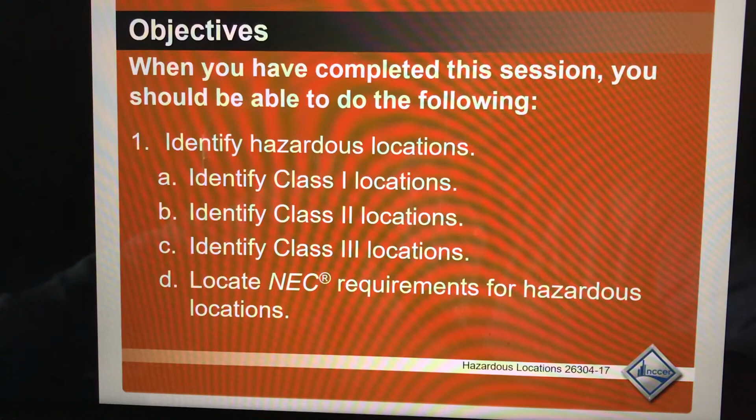Rigid conduit is one way for us to help prevent explosions because the walls of the construction of the conduit are thicker and it's threaded, so it's very solid. If there was an explosion, it would stay inside the conduit—any kind of fire or sparks in a conduit.

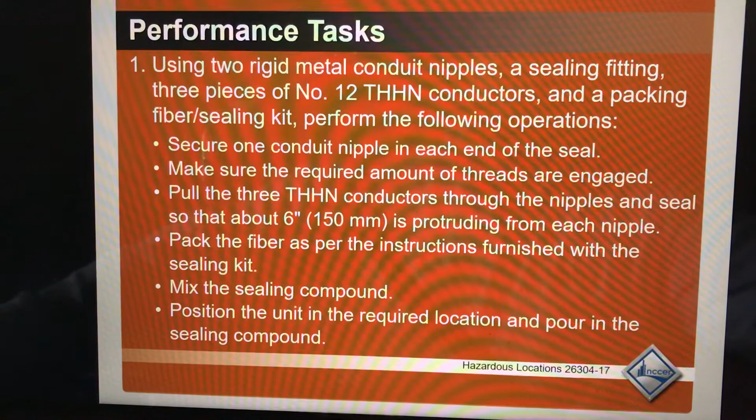Like I said, there are different types of construction locations that we do work in, and I have experience. I worked at a textile location where all they did was cut rags all day long. They would buy these big bundles of rags and cut them all day, then size them down to smaller portions, like about a foot by foot or so. The whole area was filled with fibers.

One day on the second floor of this office, there was a spark. Just a little spark caused the buildup of these fragments of fibers to ignite, and it burned the place. Not all the way down, but enough that they couldn't reopen because it was a fire hazard.

It was one of these classes that needed to be done properly according to code. So what I did was come in and we reran the conduit and did it properly. There were a lot of mistakes on that job, but anyway, this one spark ignited a fire because of the hazard materials.

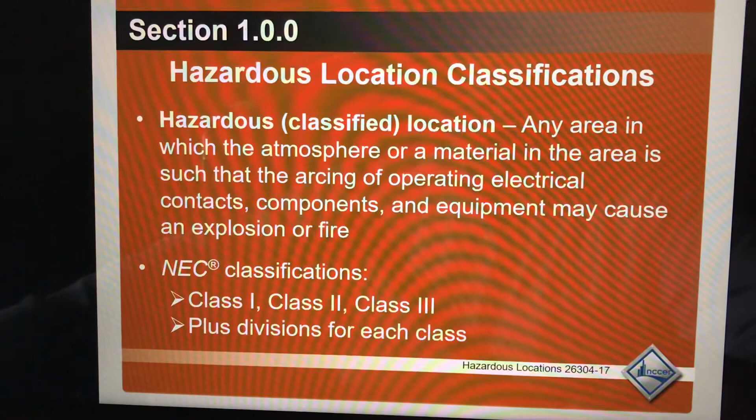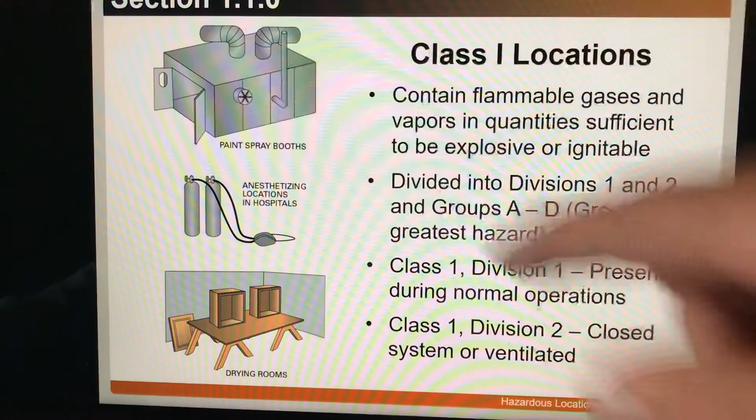And this is an example here: paint booths, like when you paint your car and stuff. They have special on-off switches—if this door was to open up, it would automatically turn off the system. Or if there was a fire or any issue in the dampers, the system would turn off. It's a special way of doing electrical, and everything inside the paint booth has to be vapor-proof lights. So it's pretty neat when you work with this type of class location.

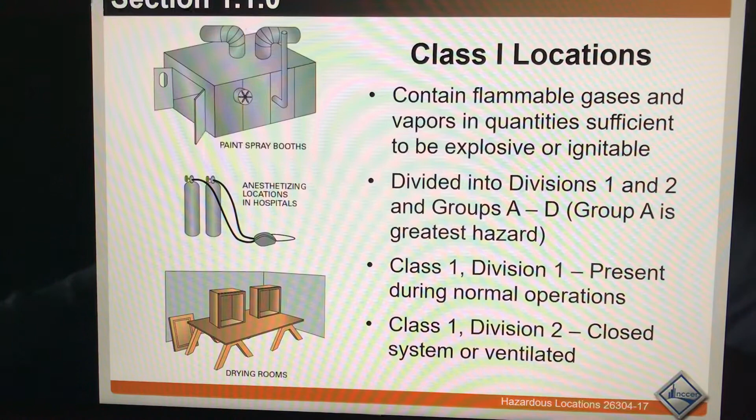You've got to know enough to do it right. This is for me one of the hardest ones to learn as an early journeyman, so be careful when you work with these classifications of installations.

Since we don't live on a farm, it's kind of hard for us to understand how this stuff works. I'm from Colorado, and I did live near a farm, so I got to see this stuff, but I wasn't an electrician back then, so I didn't fully understand why they were using those materials. But be mindful when you're working with this type of classification—some environments you think aren't a problem, but really are. So be mindful of your surroundings.

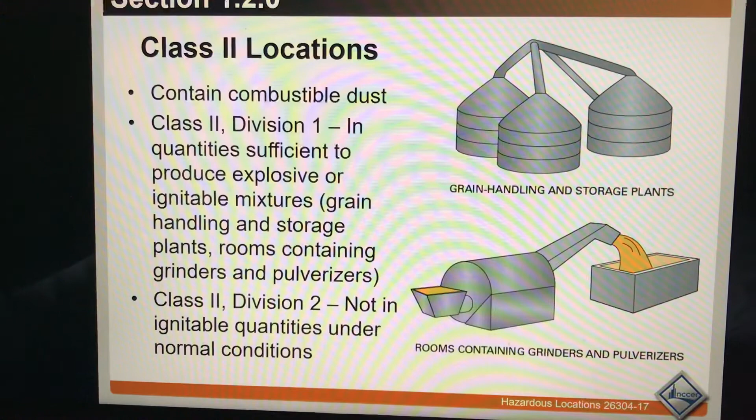Yeah, see, it's Class III locations for fibers—that's in a textile location. I actually got to see it. It wasn't a mill or anything, but they were cutting rags, and it was causing fibers to fly in the air, and it was something else. Just a little spark started a fire.

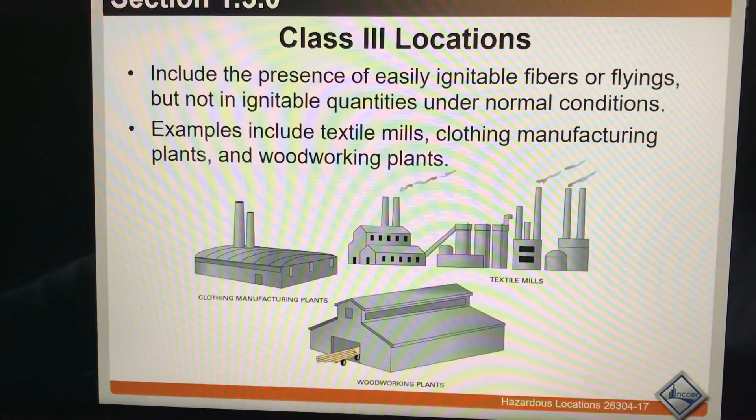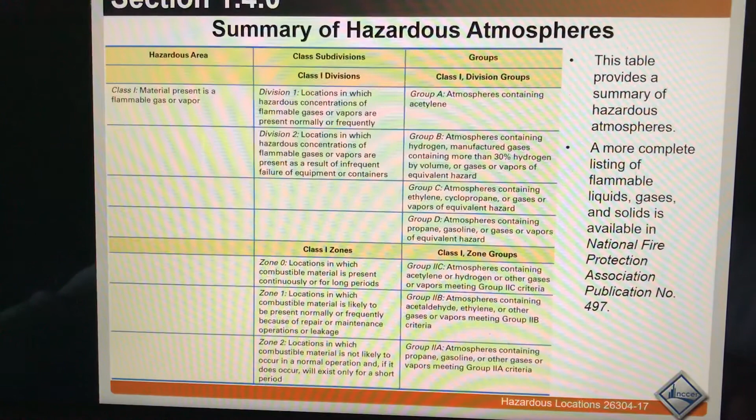This right here—you have tables in your code book as well. It's good to go through it a couple of times and get an idea of what hazard areas are, so you understand the difference between a hazard location and a normal operating location. A lot of electricians don't know anything about this except the ones who work directly in it every day.

So go through it, understand it, try not to memorize it. It's a waste of time trying to memorize this stuff, but just know where it's at and how to get to it. That's the most important thing about being a journeyman—you don't memorize the whole book, but you know how to get back to the locations where you need to know.

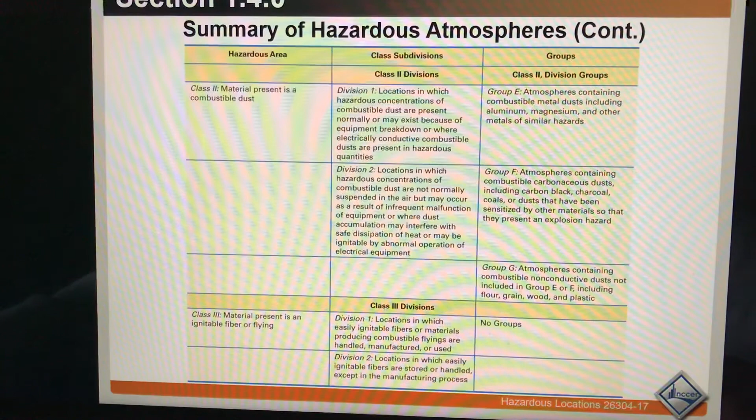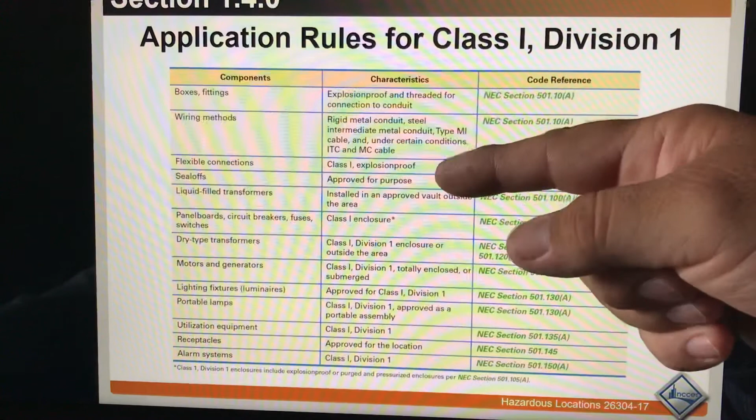A lot of times when we have explosion-proof fittings and wiring methods, if you go to gas stations, you'll see that you'll have these at the gas pump, and it's up to 18 inches, and then above 18 inches you'll have regular conduit. And I used to think, that's ridiculous. Why do you have explosion-proof fittings and conduit only up to 18 inches and then have regular conduit above that? Gas is gas, it's going to explode, but not necessarily.

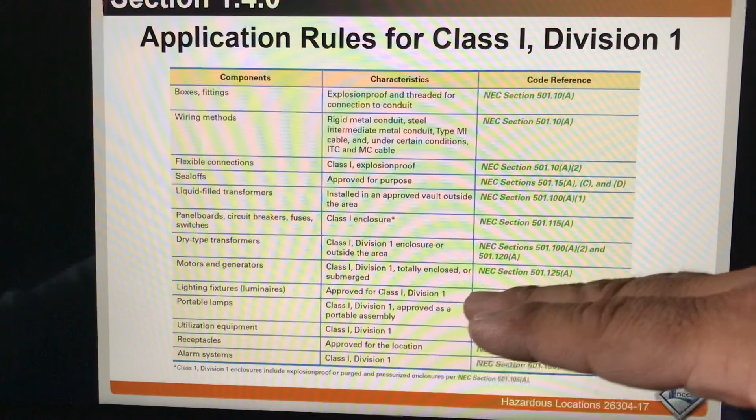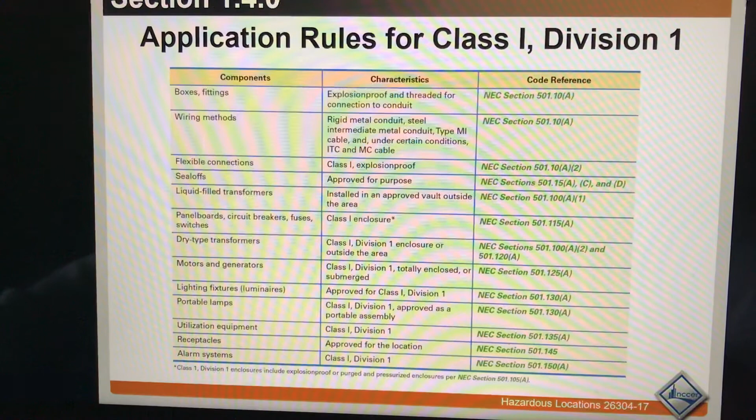What gas has is a vapor. The vapor will rise up to about 18 inches. It's too heavy to rise any higher. So that's why gas vapor probably stays lower than 18 inches. But our rigid conduit has to be around 18 inches from the ground level up. And then we had to fill them in.

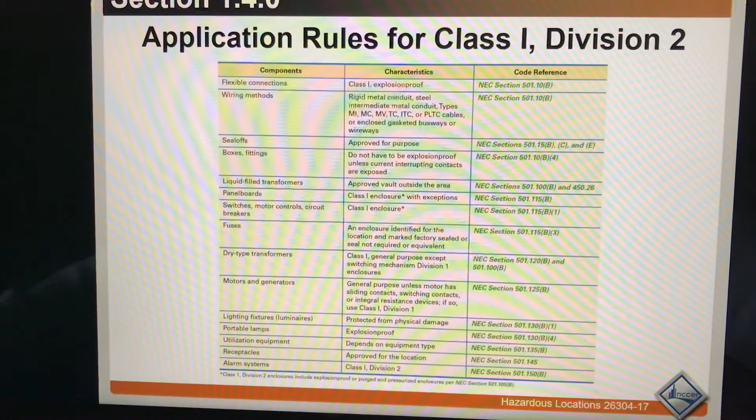And there's one time that I had to actually open up one of those explosion-proof fittings, and I had to drill out all the hard material that's inside, so that we can re-pull wire. That was a task. I mean, normally you're not supposed to do that, but I was an apprentice. They had me do it. I did it. We pulled new wire. So

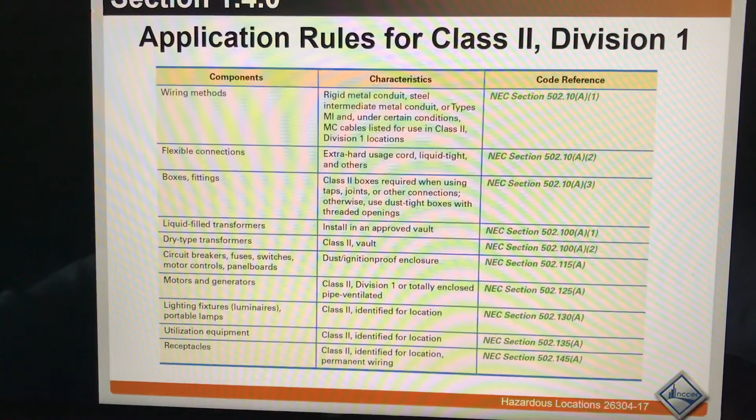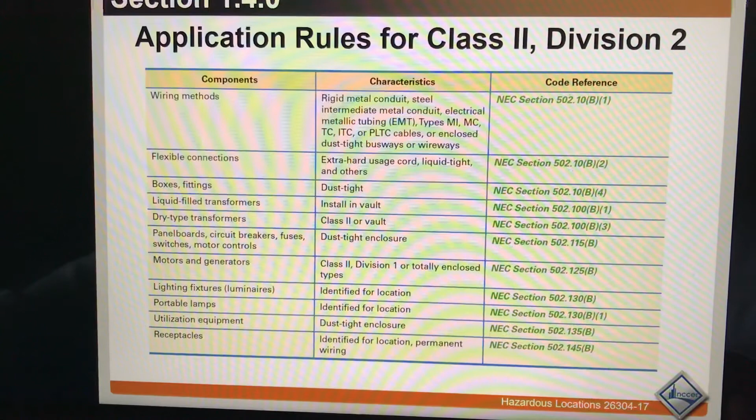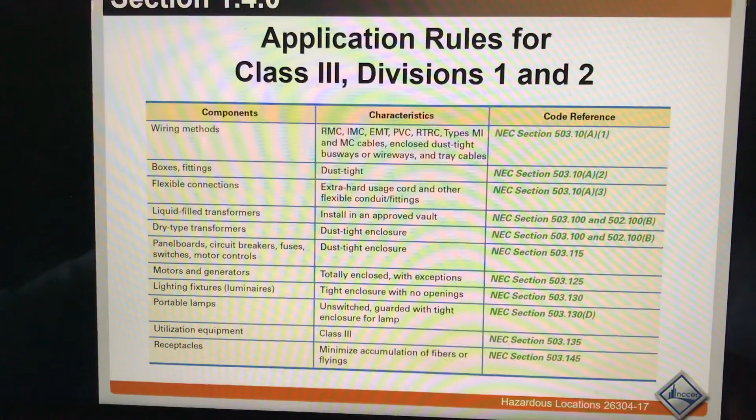Yeah, this is something that you can't just look at and memorize. I'm not too sure if you have this section, but it's good to know where it's at. Go through it a couple times, kind of read through it. It just gives you information, what you need to know, certain applications. Well, I think you should learn the classifications first, and just figure out what class it is, and then from there move on.

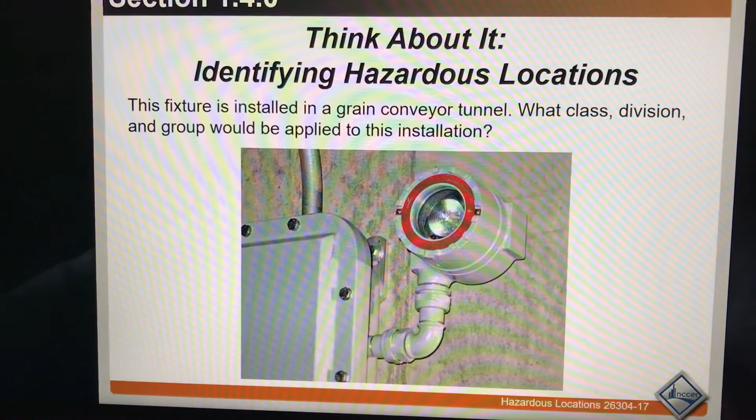So it's a grain conveyor tunnel. What classification, division, and group would be applied to this installation? Look at that. Everything is explosion proof. You find these in the shipyards. Not so much the explosion proof, but just the connector and stuff.

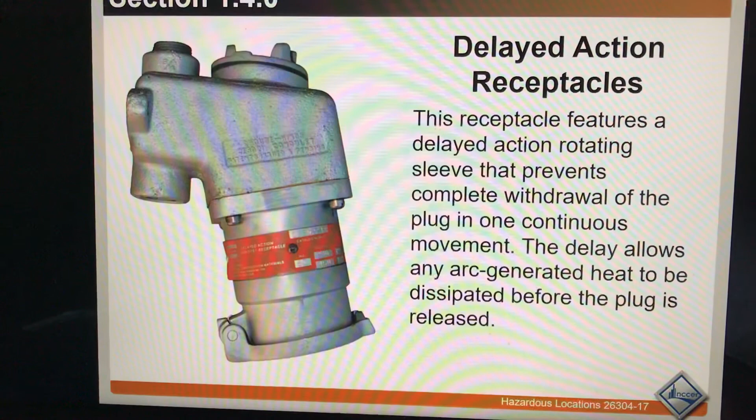I'm not familiar with this type of installation, but be aware of what you see out there, and understand when you see something like this out in the field, then you're in a hazardous location. So be mindful of it. Yeah, here we go. Class 1, Division 2. 18 inches, the height of the vapor.

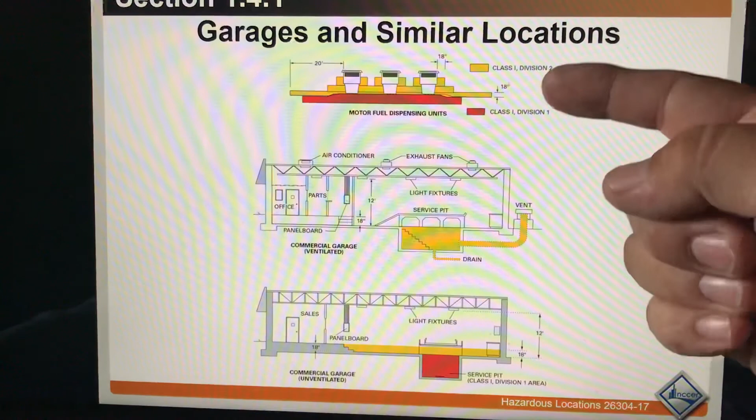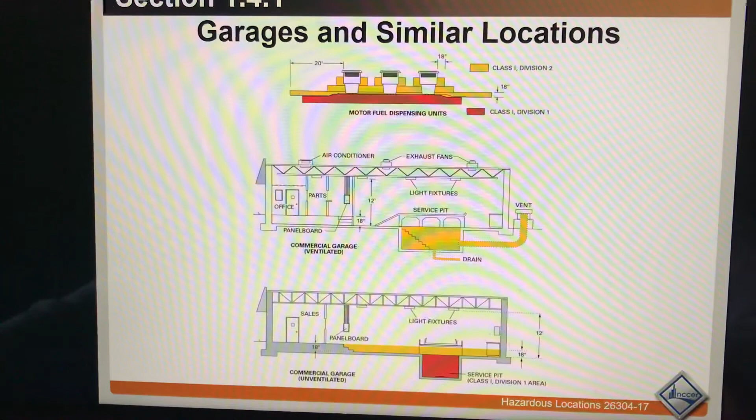A lot of times in hangars, they do the same thing. When I was working for Dynalectric, we worked in a lot of hangars, and the hangars had the same situation with all explosion-proof piping. Came up to 18 inches. The JP5 acts just like regular fuel.

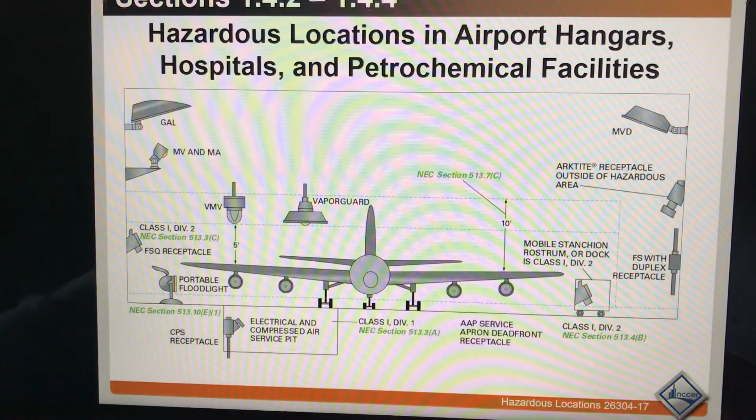Here's some more information on hangars, I suppose. It's something that if you can, especially if you're working in an airport or something like that, be mindful of what's out there. Kind of look at it and see what division you're in. But as a commercial electrician, I don't see much of this. I'm sure you will. So keep your eyes open, see what you find out there, and see what division you're in. We have a lot of paint booths and stuff like that in this area, so you should have that type of division.

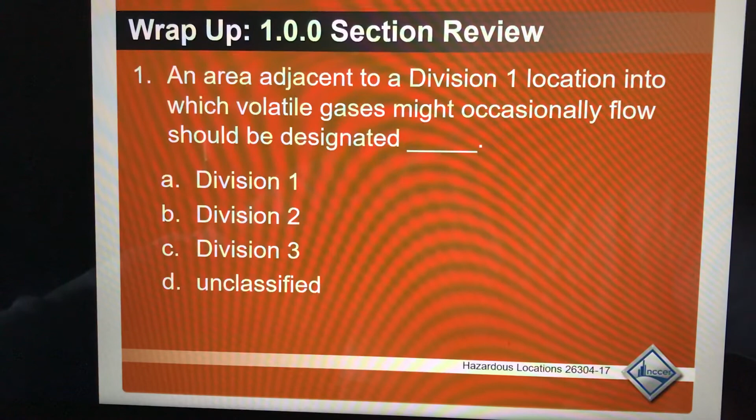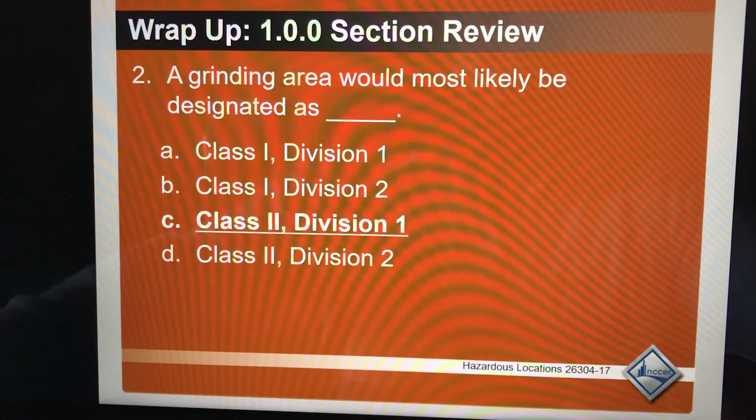Here's some questions for you guys. Give you a second to read it.

All right, these explosion-proof types of materials, I've used maybe 3 or 4 times in my lifetime being an electrician out here in San Diego, but it doesn't mean that you won't go through it. So be mindful what it is. It's very expensive parts, materials, very expensive. So be mindful if you guys become contractors or whatever, that this stuff is expensive. So you gotta know what you're doing, and know your classification levels when you do projects like this.

And most jobs like this you won't do unless there's a set of blueprints. So on your blueprints, it'll be classified. You'll understand what's going on. But if you're a builder, you might have to know the codes very well in order to do the right stuff. All right, that's it for explosion proof.